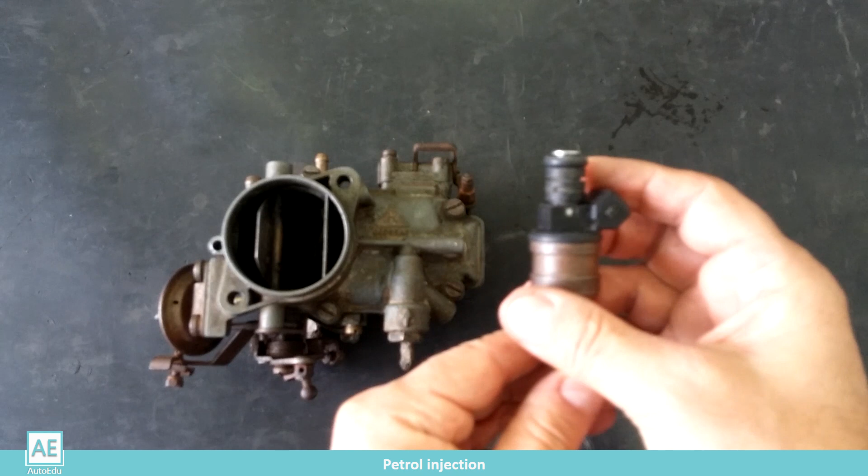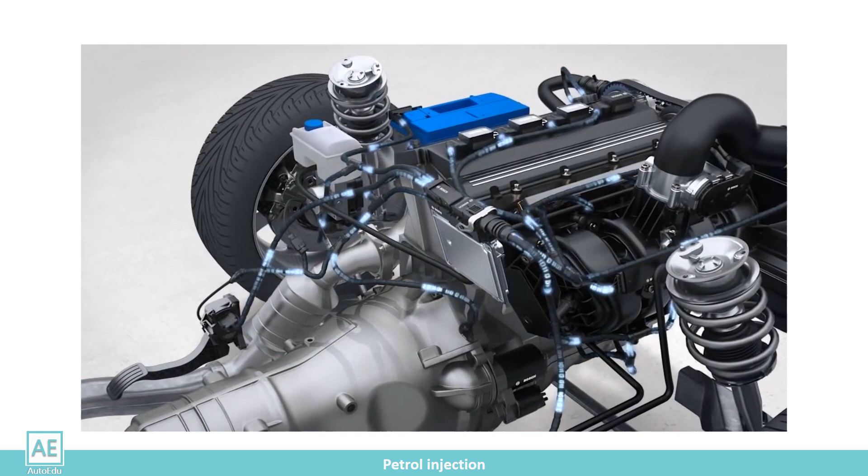In the petrol engine, the injection system replaced the carburetor. This resulted in a more precise formation of the fuel and air mixture. With electronic injection control, engines have become more powerful, reliable, economical, and environmentally friendly. With the development of new injection systems and the introduction of electronic control, engines have become much better for use in vehicles while respecting the needs of the market and legal norms on exhaust gas emissions.

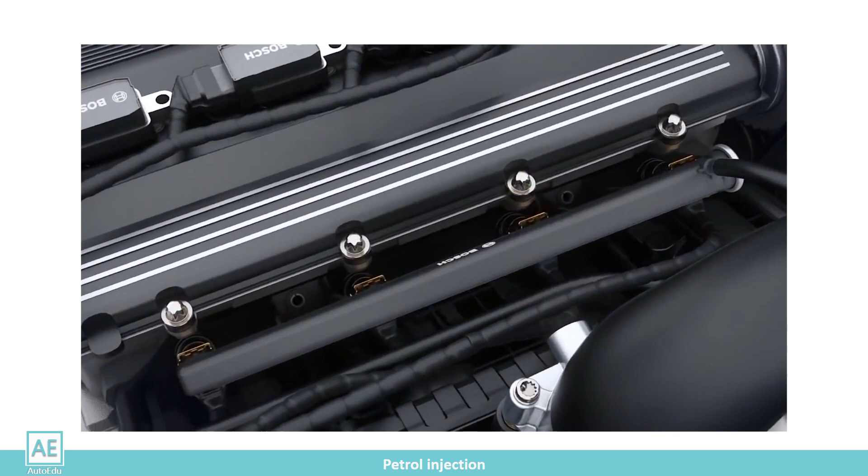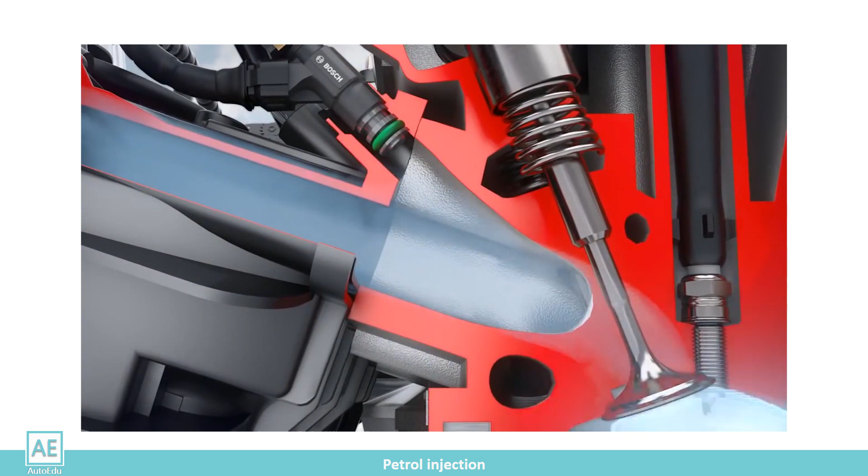A different way of forming the mixture required the introduction of many new functions and components, and thus a different approach to engine maintenance and servicing. In the following lessons, you will get to know the elements and injection systems of petrol engines, their specificities, characteristics, and methods of maintenance, testing, and repair. With knowledge of the principles of operation and servicing procedures, you can determine and eliminate vehicle malfunctions more quickly and efficiently.

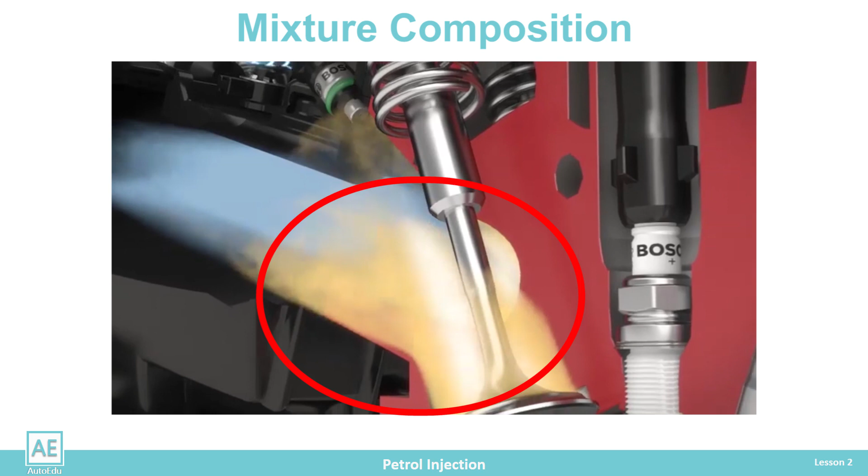The injection system's role is to form an air-fuel mixture. The proper operation of the engine in all modes, and emission of exhaust gases, that is, the catalyst operation, depends on the mixture ratio of air-fuel. During the testing of the efficiency of the engine, the ideal balance of the composition of the air-fuel mixture was reached. It is the stoichiometric ratio of the air-fuel mixture. It was found that burning 1 liter of fuel requires 10,000 liters of air. If we use the mass balance of the mixture composition, burning 1 kilogram of fuel requires 14.7 kilograms of air.

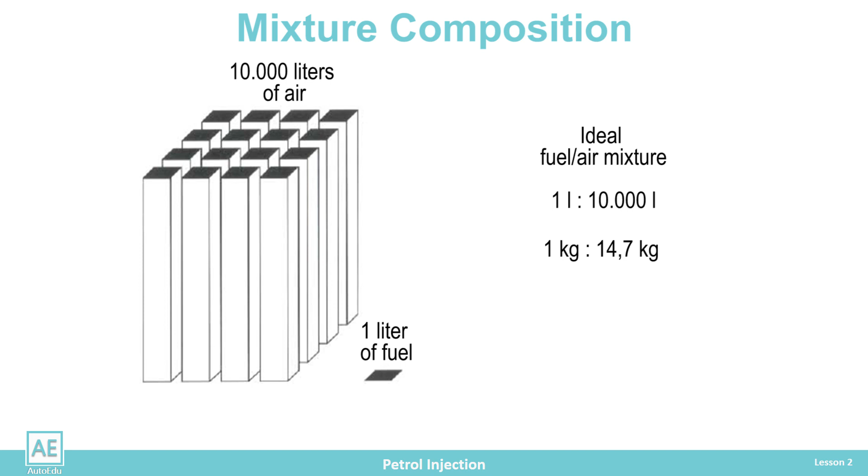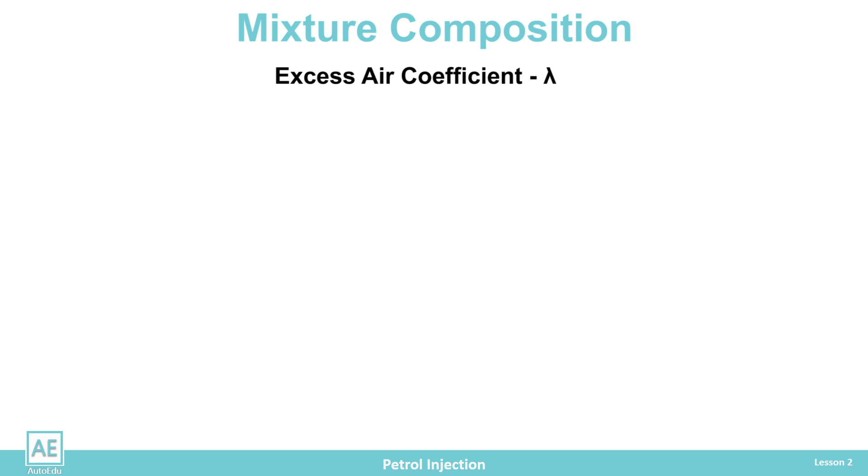For an easier understanding of the ratio of the composition of the mixture, the excess air coefficient or lambda value was introduced. The coefficient of excess air determines the ratio of the composition of the air-fuel mixture to the ideal value. The lambda value is the ratio of the actual amount of air per 1 kilogram of fuel in relation to the theoretical amount of air per 1 kilogram of fuel. When the actual amount of air in the mixture equals the theoretical amount, it is an ideal mixture and lambda equals 1. When the amount of air in the mixture is smaller than ideal, then the mixture is rich and lambda less than 1. If the mixture is too rich and exceeds the limit of 0.85, the spark cannot ignite the mixture, and combustion and engine operation is absent.

When there is more air in the mixture than the ideal ratio, then the mixture is lean. With such a mixture, fuel consumption and engine power are reduced. When the mixture exceeds the value of 1.3, it is no longer flammable. That is the upper limit of the lean mixture.

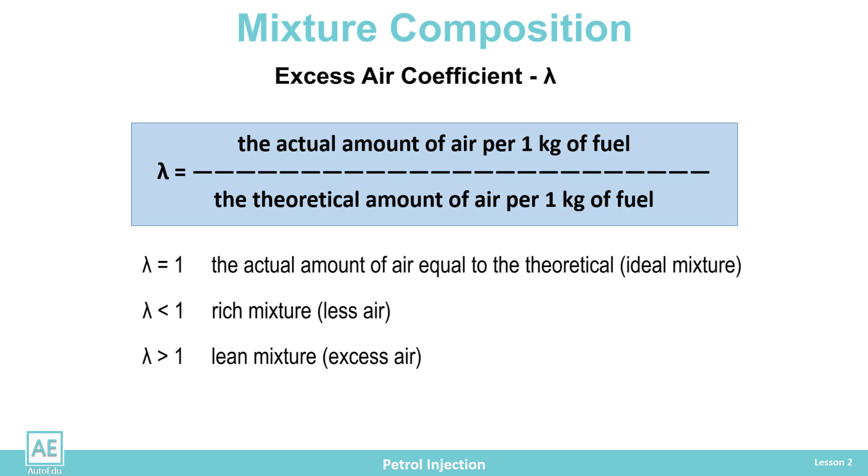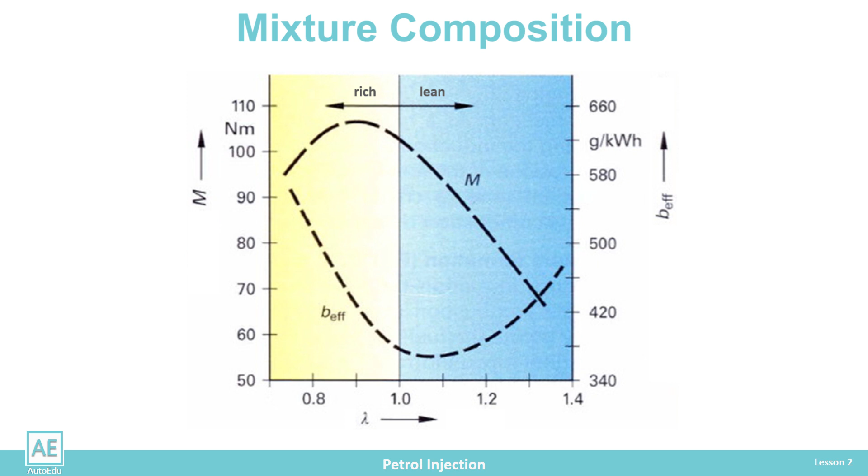With modern injection systems, during engine operation, the ideal mixture composition ratio lambda equals 1 is always maintained due to the exhaust system and the catalyst meeting the criteria of the exhaust gas emission norm. This topic will be discussed in the next lessons.

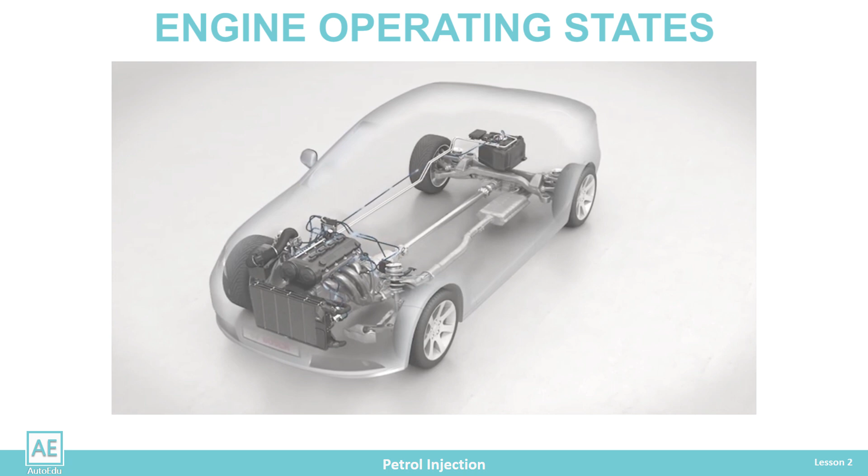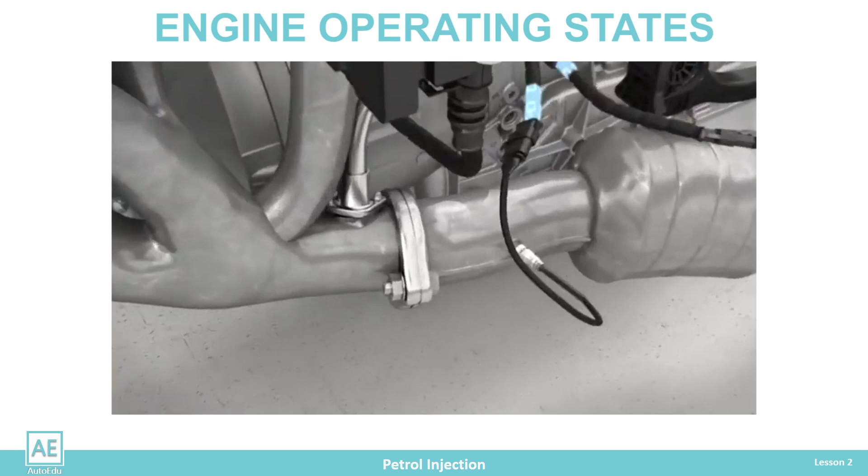Finally, to understand the operation of the injection system, we need to know what the engine's needs are at different engine operating modes. The task of the injection system is to adapt to different operating modes to meet the requirements for reducing exhaust gas emissions with maximum engine performance. Engine operating states are cold start, warming up, idle, part load, full load, acceleration, overrun, working at a higher altitude.

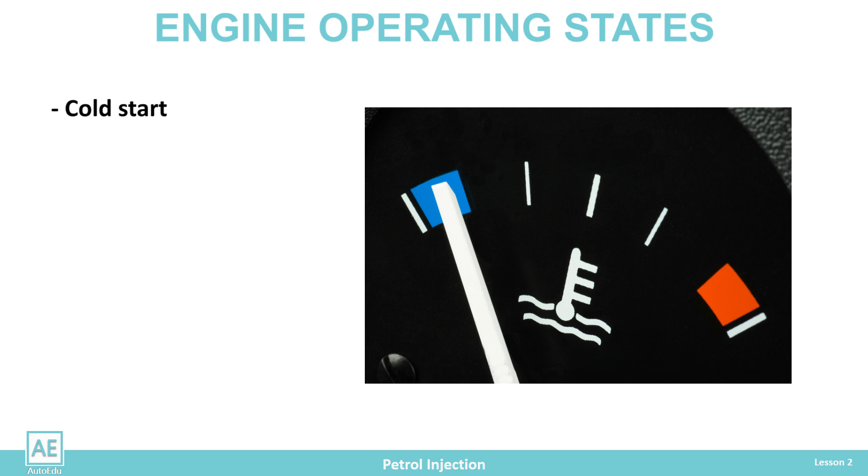When we have a cold start, the engine is not warmed up, the engine oil is thickened, it is more difficult to spread, and there is more friction between the moving parts of the engine. The mixture is cold, and the fuel condenses on the intake manifold walls, valves, and cylinders, which weakens the mixture. That's why more fuel is needed for starting.

When a cold start is performed, the engine warm-up mode begins. It is necessary to provide the conditions for the engine to warm up as soon as possible and reach the operating temperature without impairing the emission of exhaust gases.

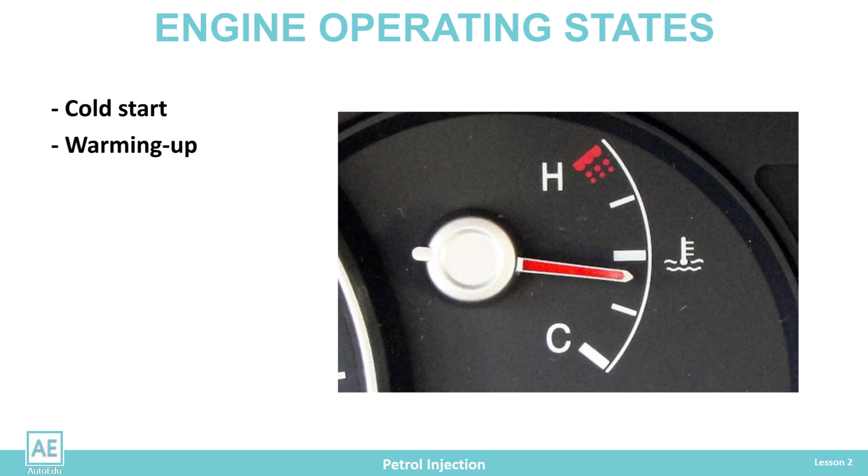When the vehicle is stationary, the engine is running at idle speed. A fine regulation of the number of revolutions is required to have a smooth engine operation. Otherwise, the unstable operation is transmitted to the entire vehicle, which impairs passenger comfort.

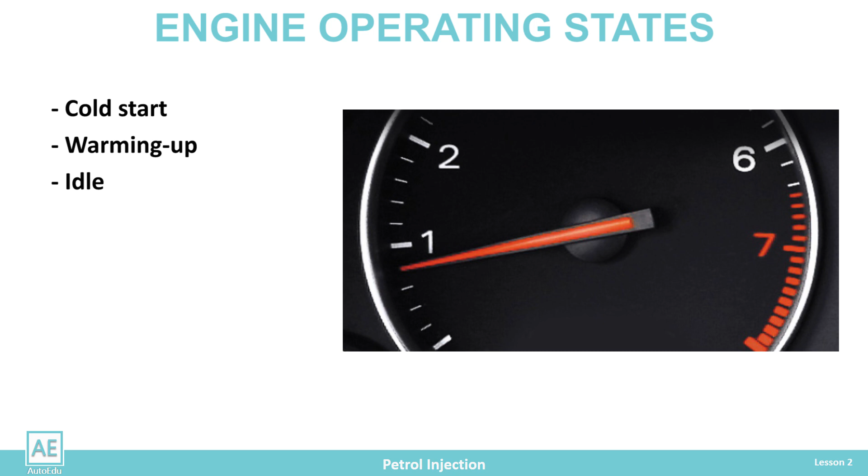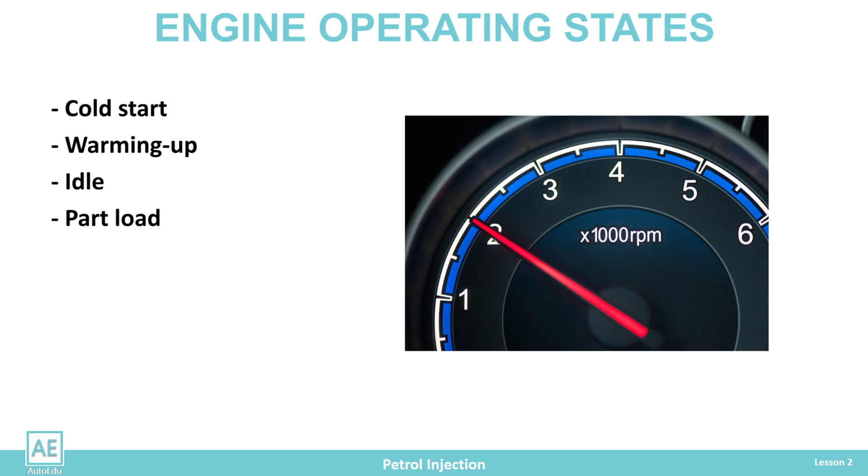Part load is at lower RPM when engine torque is high. In this mode, fuel consumption is lower with stable and quiet engine operation.

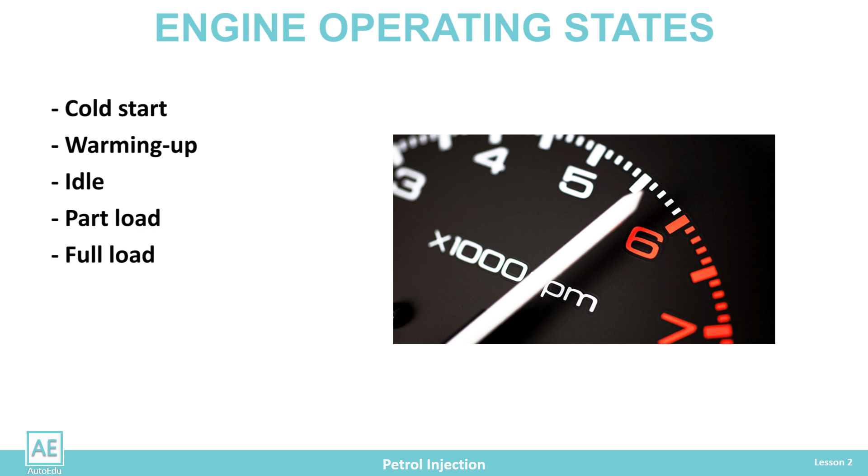Full load mode requires more engine power and more fuel for its operation. This mode is activated when the vehicle needs to overcome a hill or is under a full load.

Acceleration of the vehicle is a special mode when the speed increases suddenly. For the engine to provide a higher power output, it needs more fuel.

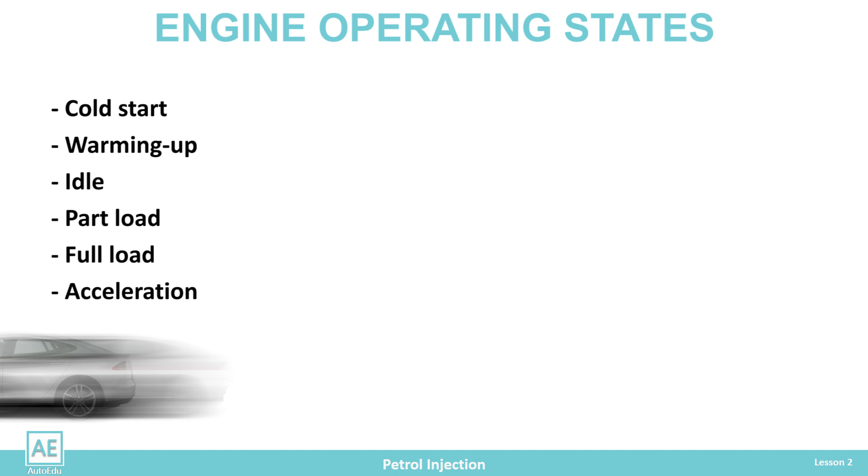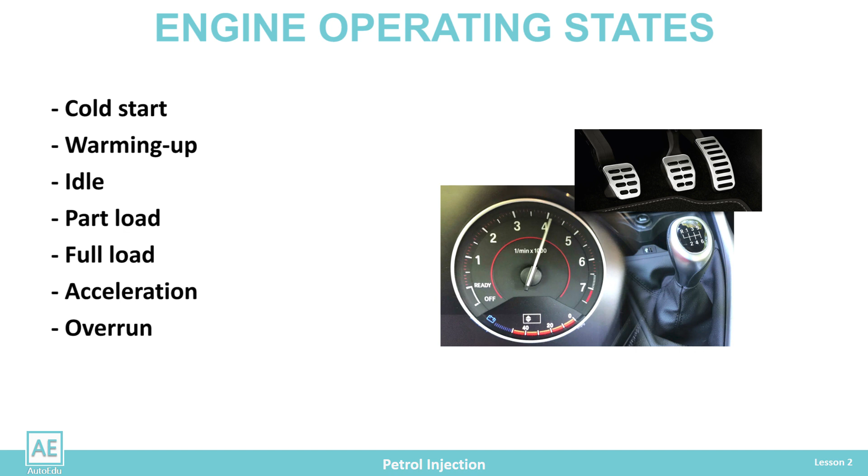Overrun is a motor braking mode. When the driver predicts that he has to slow down a bit, he releases the gas pedal. The system cuts off fuel injection, and the engine functions as an air compressor. The engine slows down when it compresses the air in the second stroke. Since there is no ignition and combustion, the vehicle stops quickly.

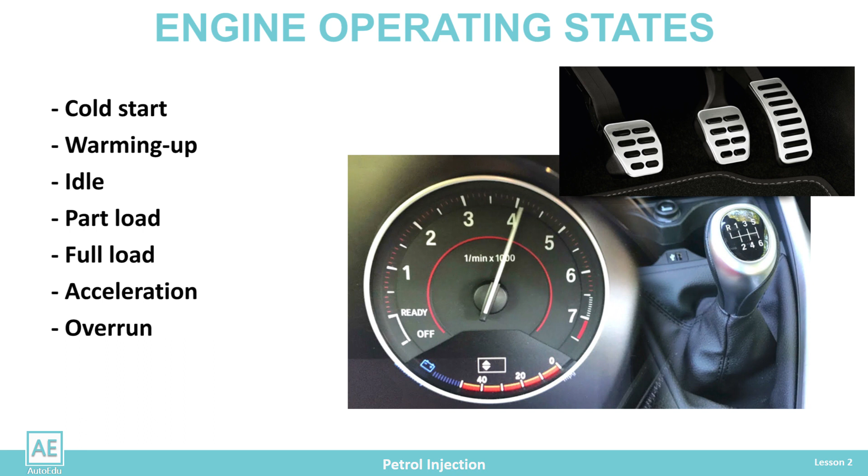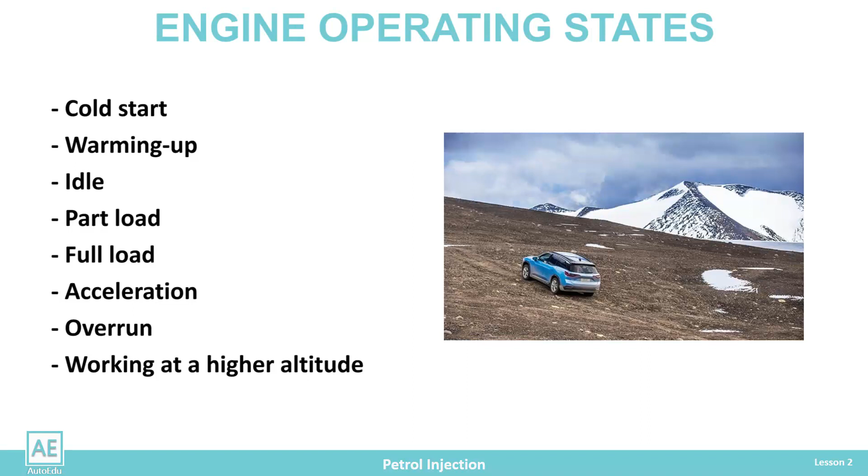At higher altitudes, the air is thinner and there is less oxygen to burn. The system in this mode should adjust the injection and mixture formation.

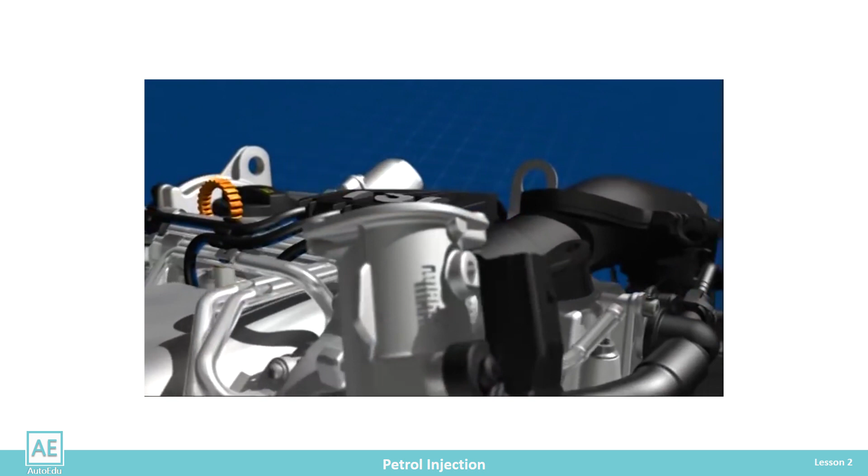With the introduction of injection, there was an improvement in the process of controlling the formation of the mixture and managing the processes of engine operation. The mechanics have not changed much, but with injection, there have been significant advantages in the engine operation itself.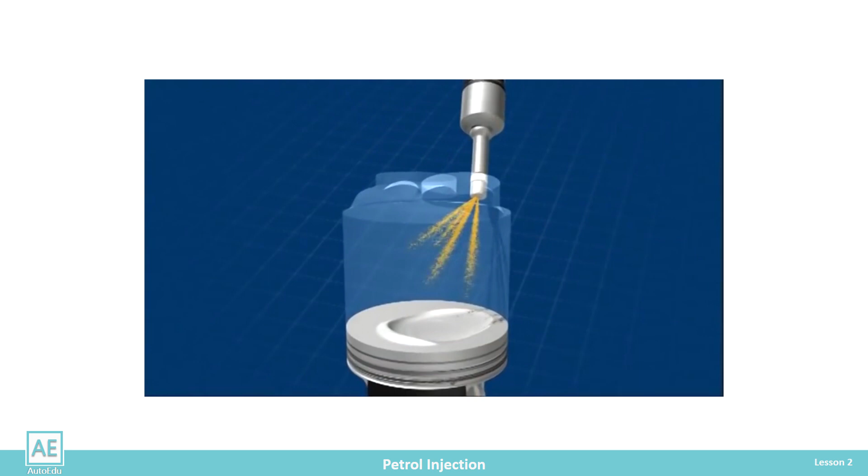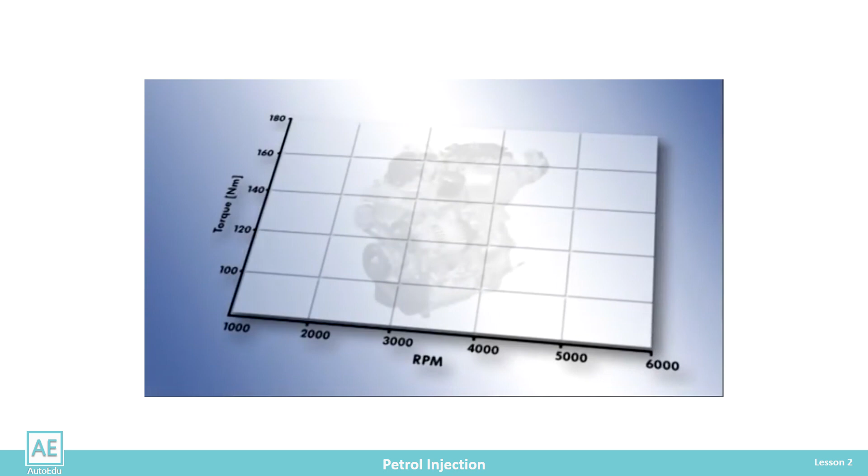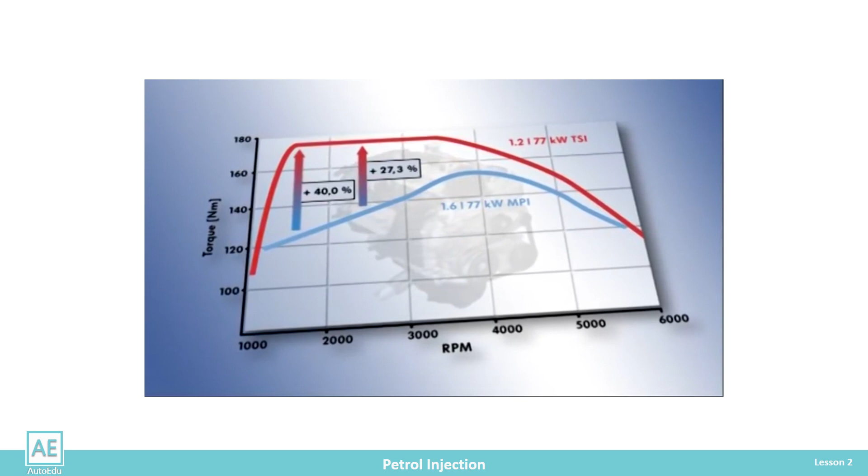The advantages of the injection system compared to the carburetor system of mixture preparation: more precise mixture preparation in all engine operating states, better cylinder filling, higher torque and engine power, lower fuel consumption, fine dispersion of fuel, faster fuel evaporation, equal distribution of fuel to each cylinder, and shorter transport paths of the mixture to the cylinder.

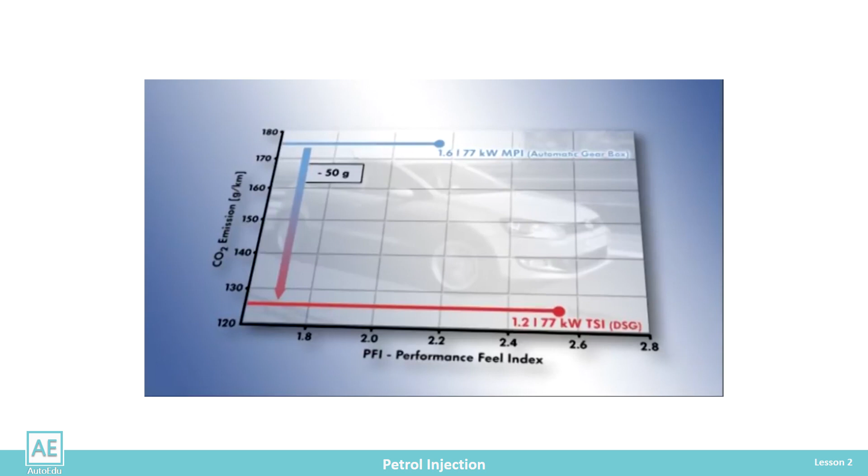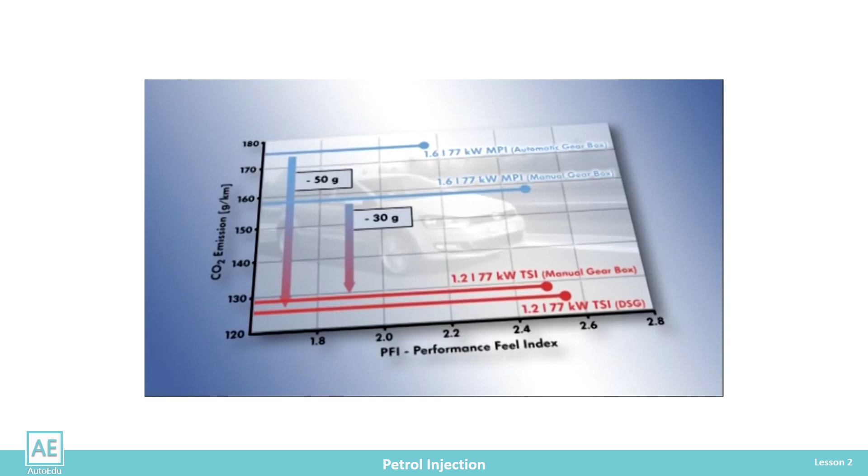Greater elasticity of the engine during a sudden change in the operating state. Easier and faster engine warm-up. Better engine acceleration and engine braking. Lower exhaust gas emissions.

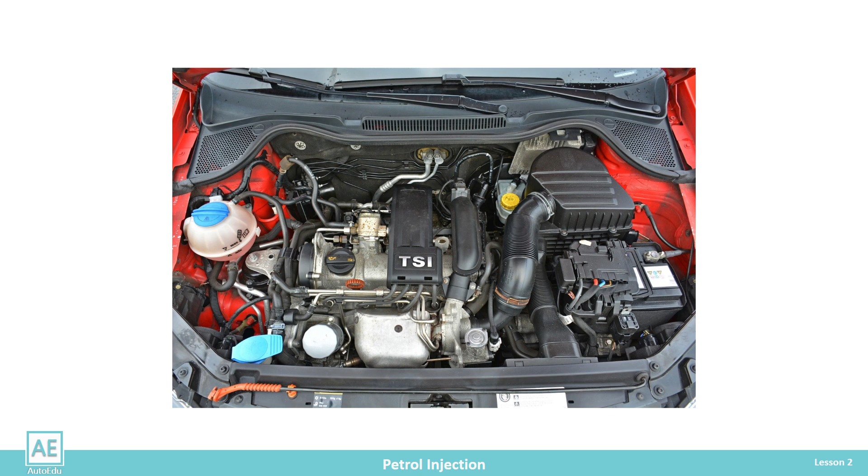To check the correctness of the injection system on the vehicle, the service technician should recognize the type and know how that system works, what elements it consists of, and which are its characteristics and specifics. Only in this way can he successfully determine the malfunction based on the symptoms of the malfunction.

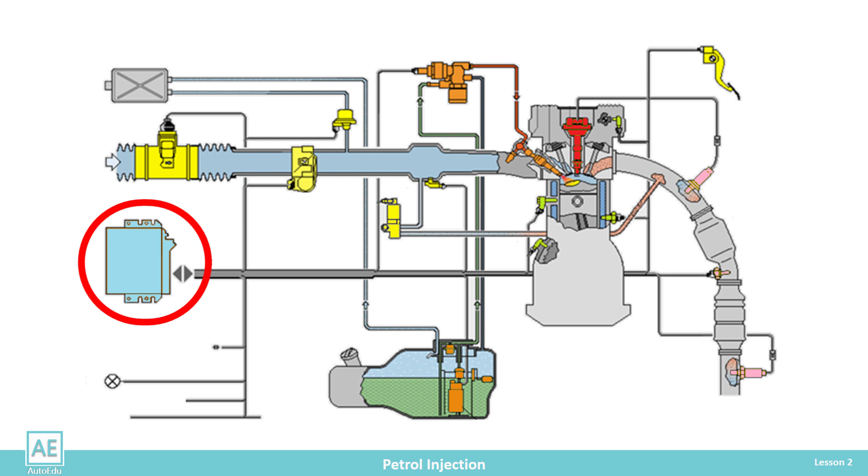The injection system is an electronic engine control system. The central place is occupied by the electronic control unit, ECU, that monitors and controls all processes of the injection system and engine functions. The ECU controls the engine functions based on the received current data from the sensors and stored values via actuators. All engine and electronic control elements that act on the same area can be grouped into subsystems.

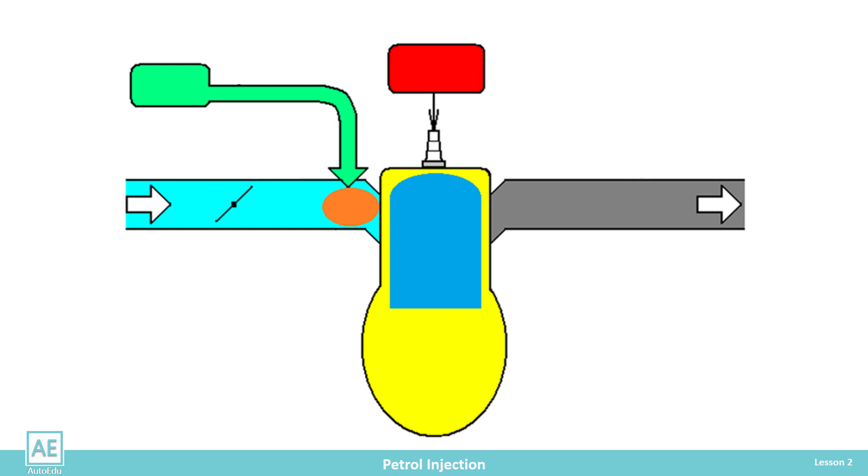Subsystems that can be considered separately are air intake, fuel supply, mixture formation, combustion, ignition, and exhaust. To understand injection, one needs to understand the role of each subsystem, the way it works, and the characteristics of its components. We will cover each subsystem individually, followed by the operation of the various injection systems. You can look at the ignition in the petrol engine ignition system lesson.

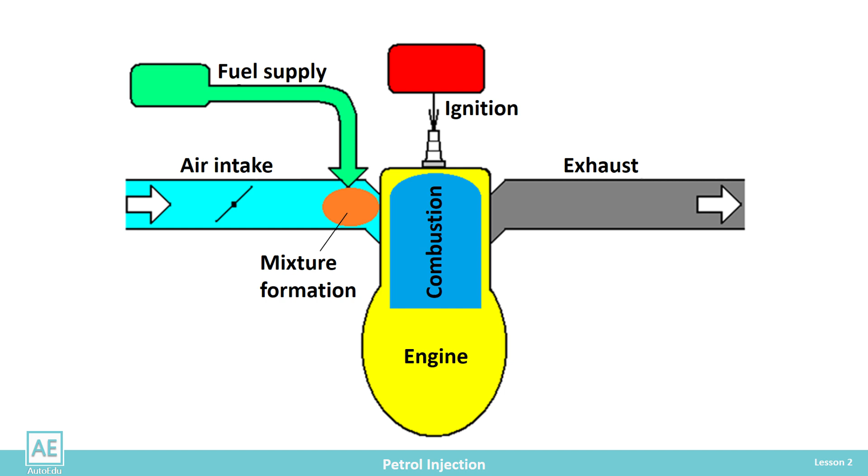First, let's see what elements the air supply system consists of and what their task is. For the correct operation of the engine, it is necessary to form a mixture of fuel and air. Air is taken from the environment and fed through the intake line to the engine, where the mixture forms. Air allows the fuel to burn inside the cylinder.

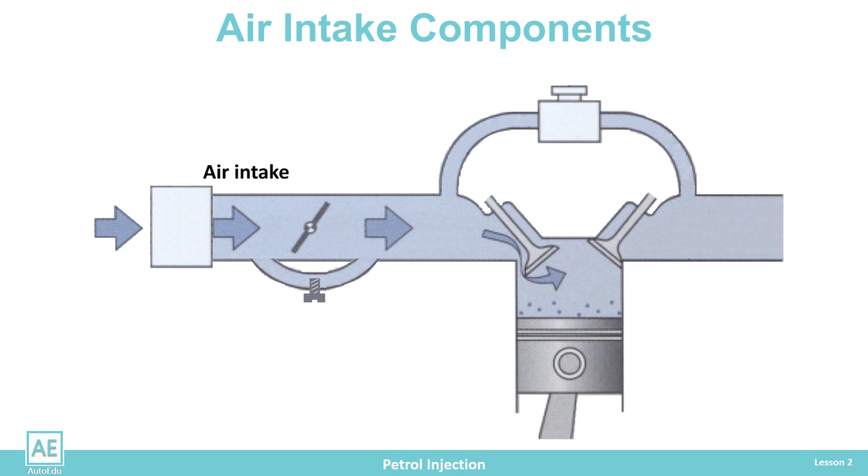The air must be cleaned to measure the amount that is ready to form the mixture and reach the cylinder. For delivery, an intake manifold is used, on which the following components are located: air filter, throttle, and throttle bypass. Most injection systems also have a return line where part of the exhaust gas is fed into the intake manifold via the EGR valve. Exhaust gas recirculation serves to control exhaust gas emissions.

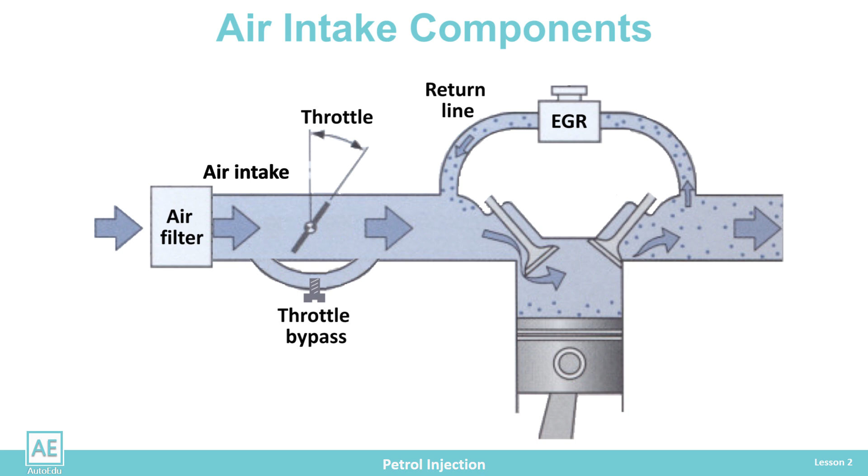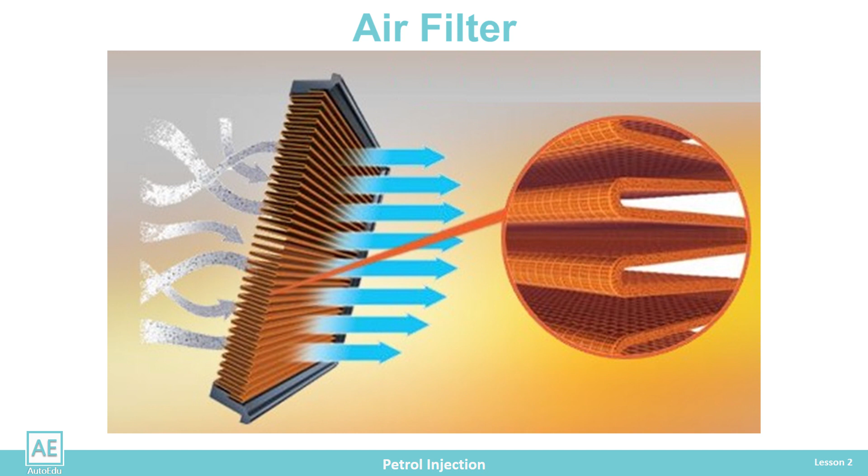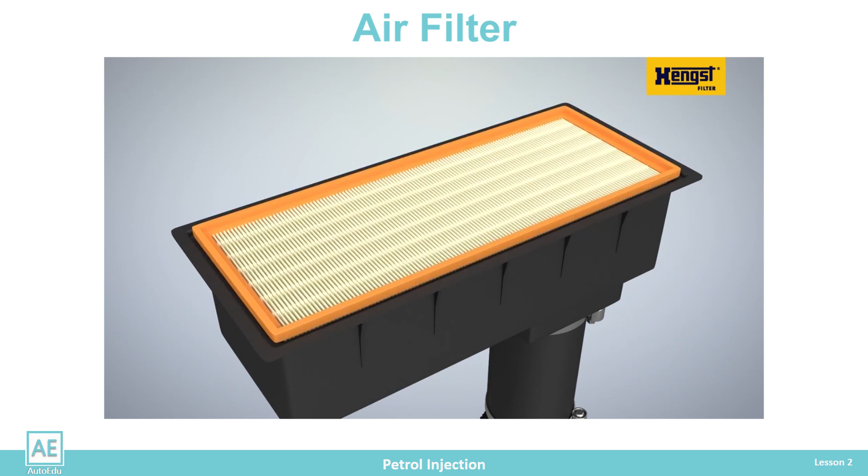The air must be cleaned of impurities before it enters the intake manifold. That's what the air filter is used for. The air may contain dust particles from 5 to 50 microns in size and quartz. The concentration of impurities depends on the driving conditions, asphalt or dusty road. If it gets into the engine oil, this dust forms an abrasive film, which leads to extreme wear, especially on the cylinder walls, pistons, and valve guides.

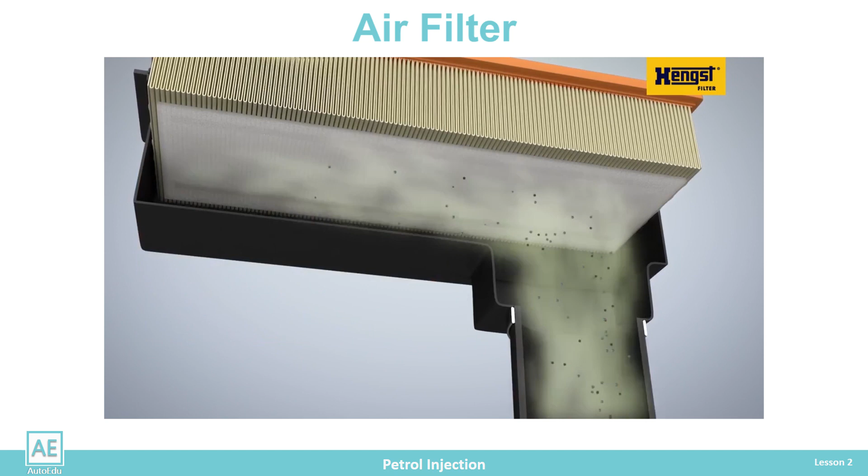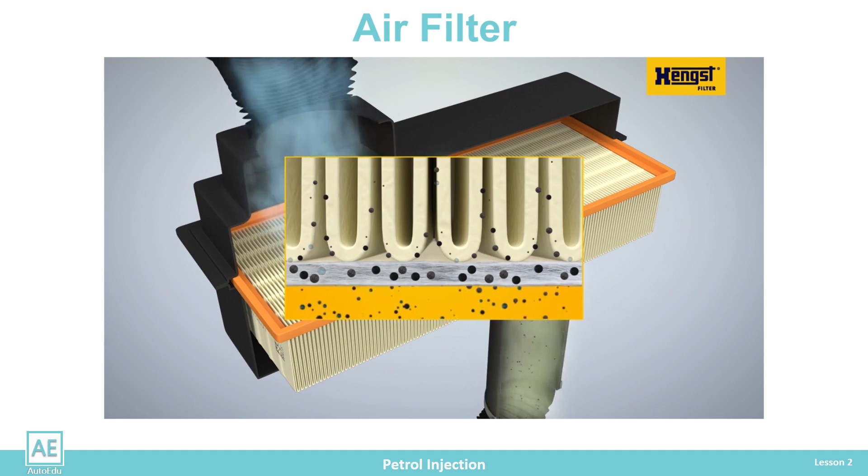A dry air filter is most often used on vehicles. The filter retains impurities, and over time the air permeability decreases. When a sufficient amount of air no longer passes through the filter, the composition of the mixture is disrupted and the filling of the cylinder is reduced, which leads to a deterioration in engine performance.

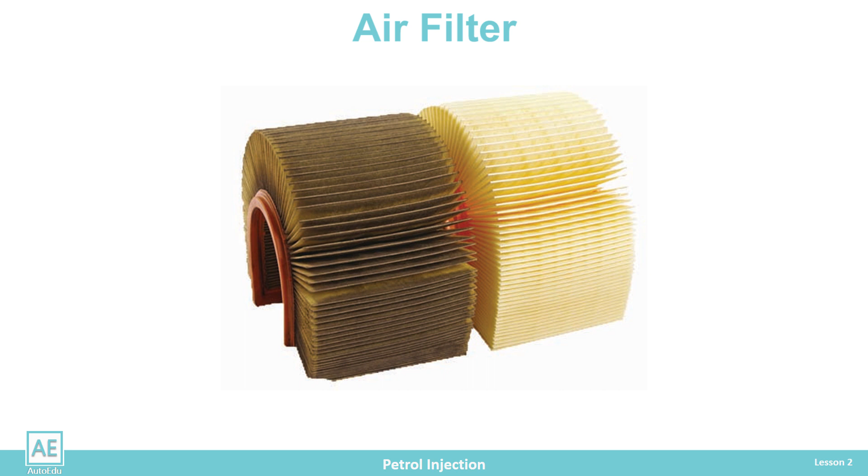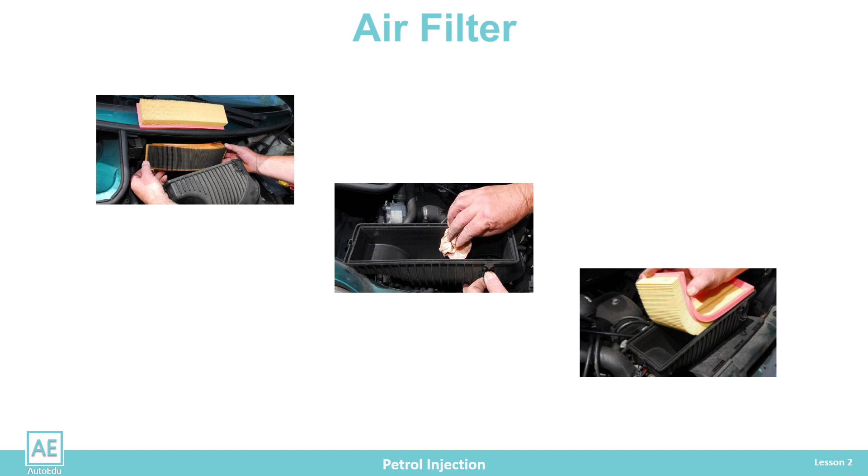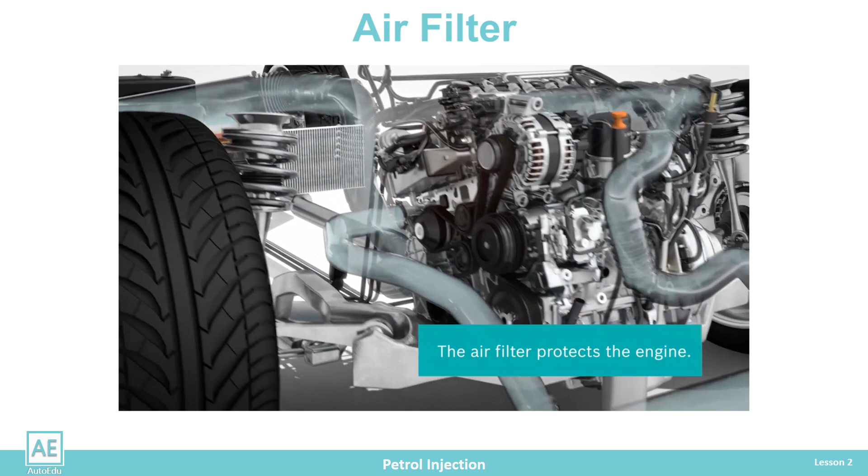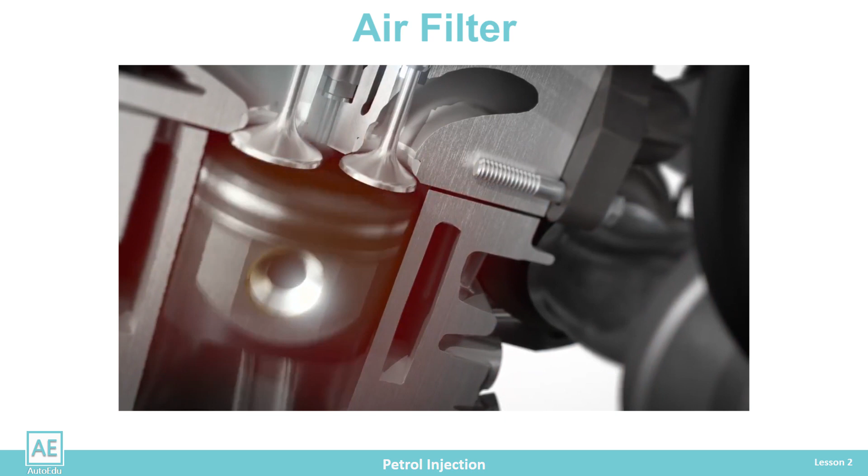All vehicles have a prescribed air filter replacement period based on normal engine operation. However, when the vehicle is used in an adverse environment such as dust, the life of the filter is shorter. The air filter, in addition to removing impurities, also dampens intake noise. Without the filter, the engine would be noisier during operation. The replacement interval is prescribed by the vehicle manufacturer, but in adverse, dusty conditions, the filter life is shorter.